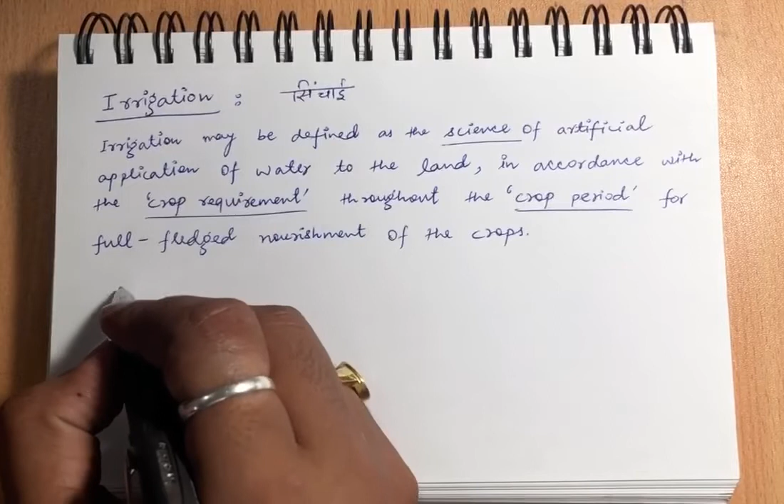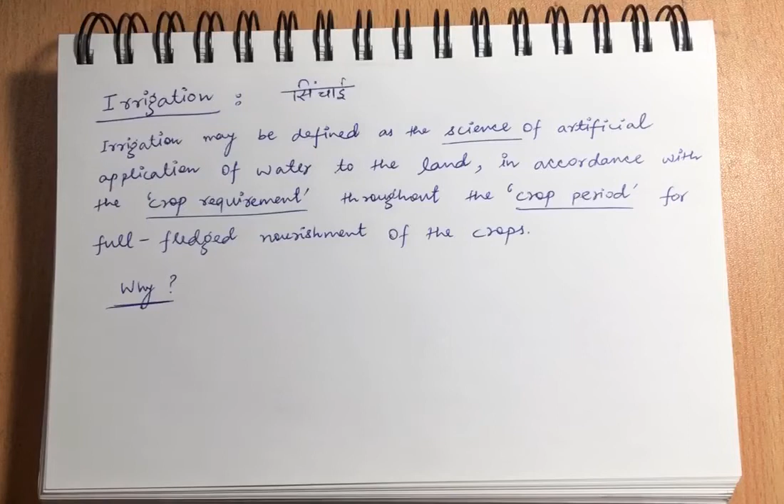So now you will ask why. Why do we need this science of irrigation? Why do we need to put the water artificially, especially in a country like India? Because, as you know, the monsoon is there. We are hugely dependent on monsoon for our crop requirement.

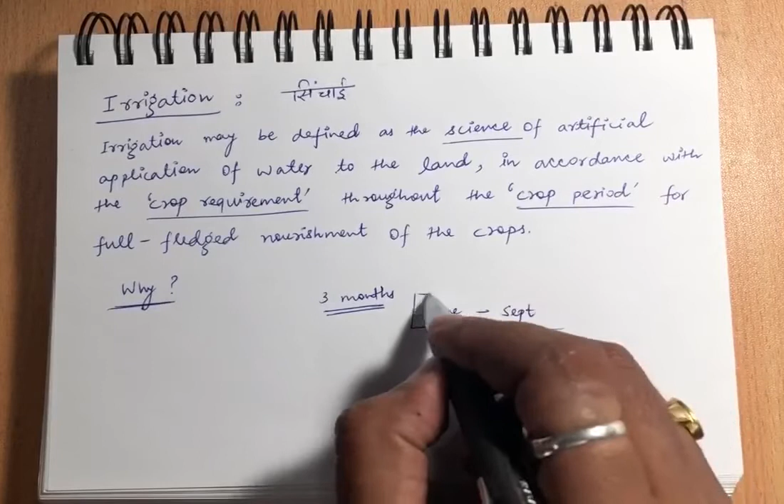So monsoon is for, let's say, 3 months. It is starting in June, and if it is a very good year for monsoon, it will end in September. So let us say 15th June to 15th September. So in an ideal situation, for 3 months we are having a very good rain.

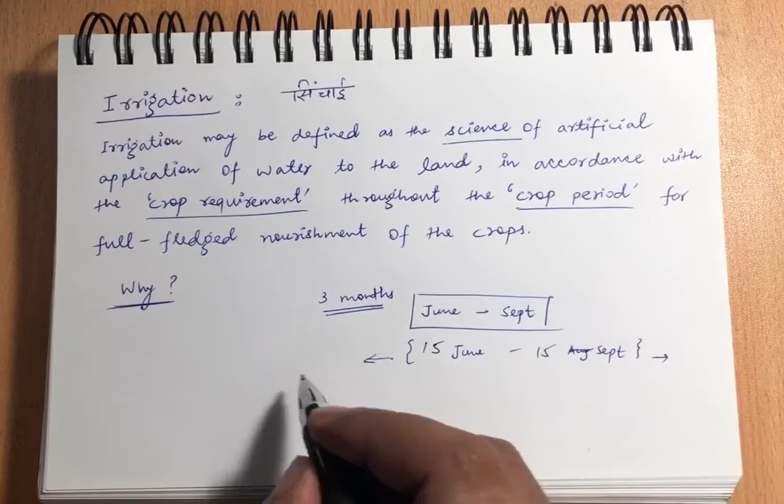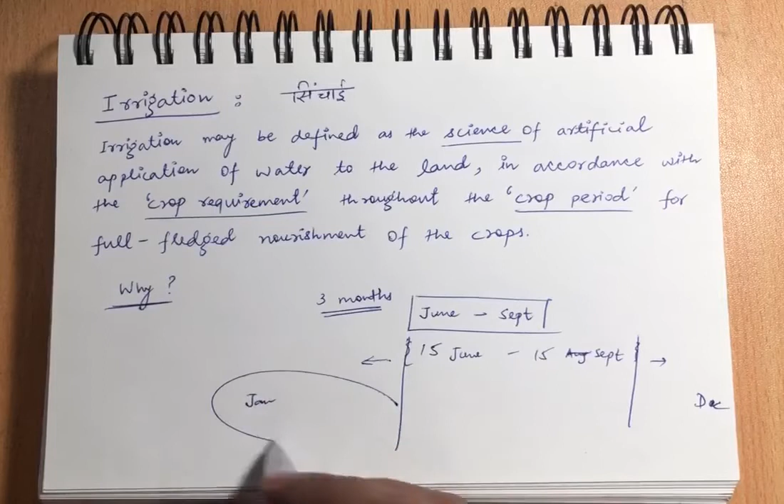But what about this period? We are having January to December, but we are having rainfall only in this period. So how are we going to deal with the water requirement for these months, approximately 9 months? It is not like we are not going to crop. We will be sowing the crops. We are not going to sit idle.

So for that period we are going to design our irrigation system. Rainfall is there, precipitation is there. So we will store this rainfall water in the reservoir. Okay, let me go to the next page.

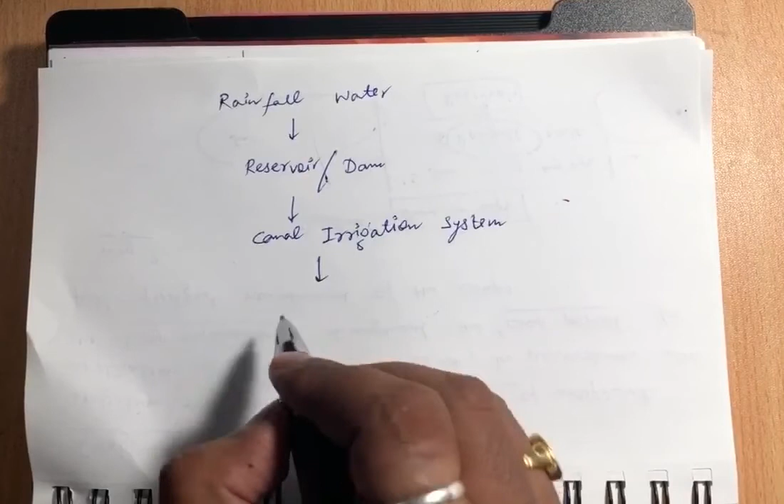Okay, so rainfall water is there, going to reservoir or dam. Through reservoir and dam, with the help of canal irrigation system, we are going to, so this will be the course of water from rainfall to application in the field.

So as I have told, there we are hugely dependent on rainwater. So we have to design our irrigation system such that we can use the rainwater which is occurring only for 2-3 months for the whole year. That is why we need irrigation system.

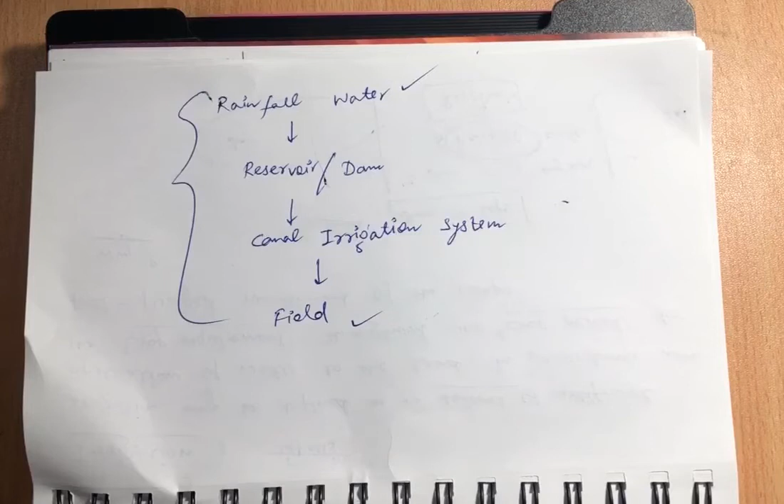Okay, now let us say, if we are doing something, there should be some advantage only. We are not doing it just for the sake of doing. There should be some advantages. So what are the advantages of irrigation?

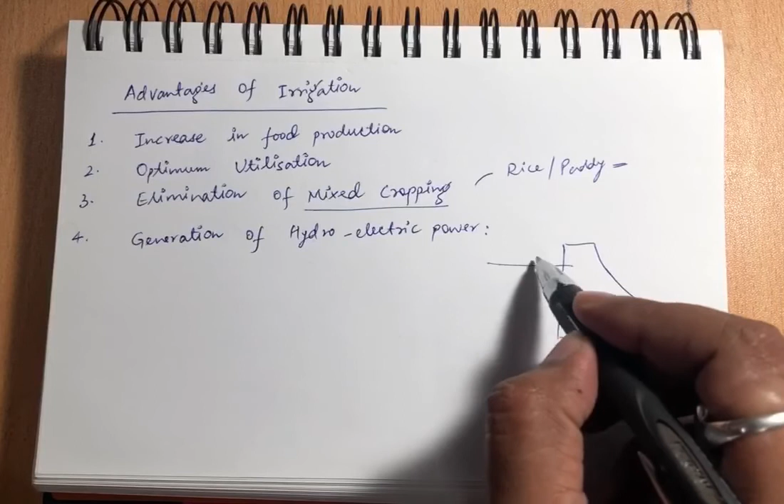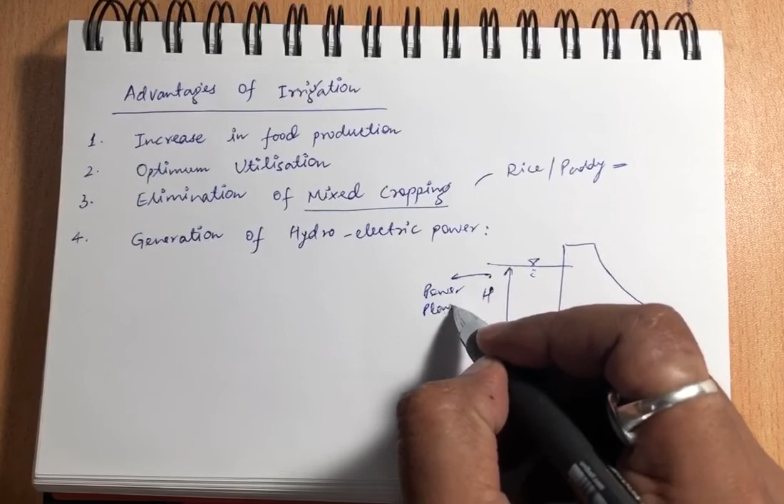Now next is generation of hydroelectric power. So the water which is stored, let's say this is the dam. Okay, so this is the water we have stored. This water is there in huge amount, for a very long period of time. So we can take this water to a power plant so that we can produce electricity. So this irrigation water system is also helping in power generation.

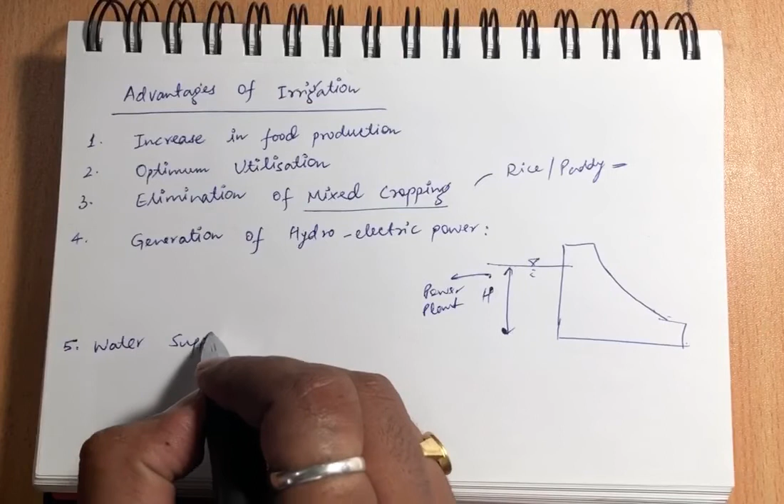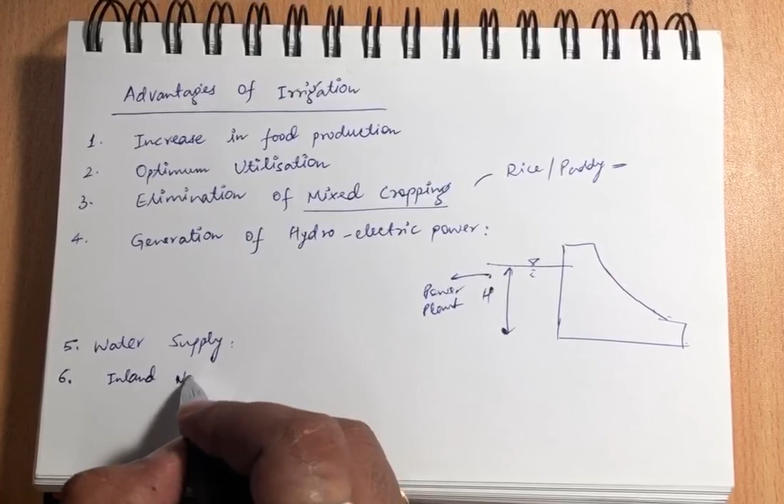Next is water supply. We can use this water for general water supply also. Domestic water supply requirements can be met with the help of this water. Inland navigation. Okay, so through this reservoir of the irrigation water system, we can use it for inland navigation too.

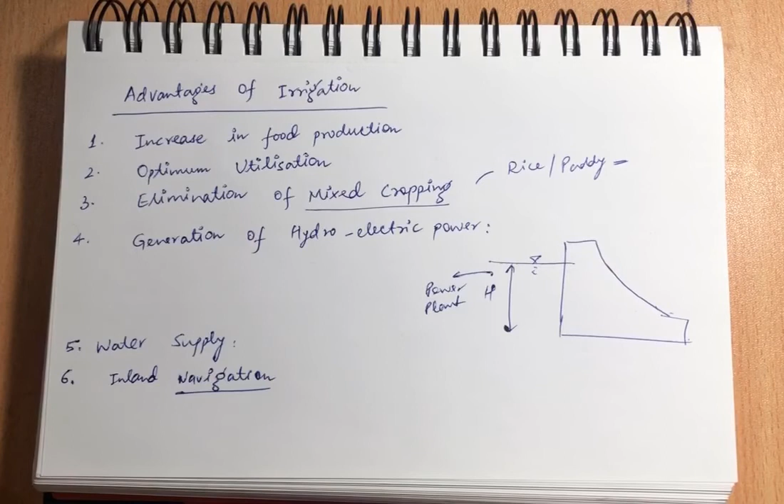So it is not like irrigation is having only advantages, there are some disadvantages also. So let us see what are the disadvantages. So first is water pollution. How is irrigation going to pollute the water? Because the farmers are using various kinds of chemicals like fertilizers, pesticides, insecticides. So it will go and mix with water and it will get the water polluted.

Second is irrigation damp conditions. Irrigation water, if applied in excess, will create damp conditions in the localized area and the areas which are in the vicinity of that field. Third is water logging. It is a very major problem. In water logging, we have applied excess amount of water, so in the fields water is getting accumulated, and this situation is termed as water logging. So these are some disadvantages of irrigation water system.

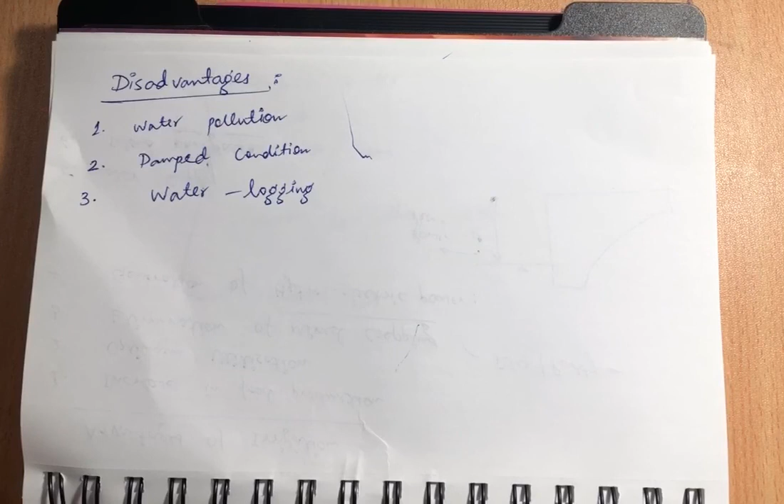So this is all for today. In the next lecture we are going to deal with types of irrigation, and later on we are going to see the various kinds of efficiencies and how this whole irrigation system is working. So this is all for today.